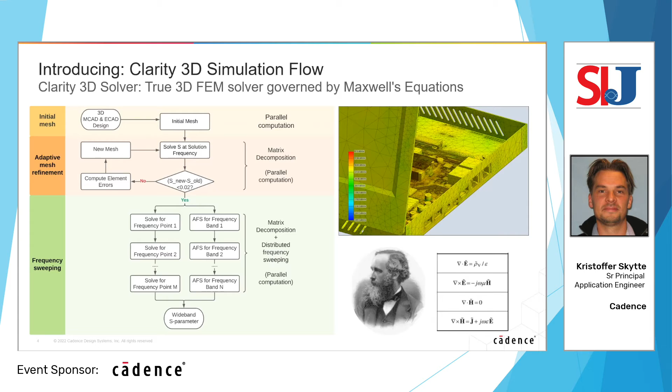So you might ask from Clarity, what is really new, what is being brought to the table here that's not existing in the market today? And that's shown in the next slide, which is we can separate this out into 4 groups, starting here on the upper left. One of the things particular to Clarity is that it integrates directly into the design environment.

So whether you're working within the Cadence design environment for IC, for package, for board, it's possible to launch Clarity directly, get results back that help you guide the design process. And you don't have to think about all the setup related aspects and the back annotation and so on. And this also actually applies across the microwave design environment from Microwave Office.

The other aspect, and this is actually one of the key enablers for allowing you to simulate bigger structures, is the massively parallelized matrix solver that we have added on top of Clarity. Essentially what it does is take the very big matrices that are typically built up by FEM solvers and distribute them across multiple machines through this parallelized matrix solver.

The nice thing about that is that with traditional FEM, you're limited to how much memory you can have on a single machine. That sets the limit for how big a project you can actually solve. With Clarity, because of this parallelized matrix solver, you're not confined to one machine. The entire matrix doesn't have to be within the memory of one machine. That means we break free from that limitation in other FEM solvers, which is that the matrix must be within the memory of a single machine.

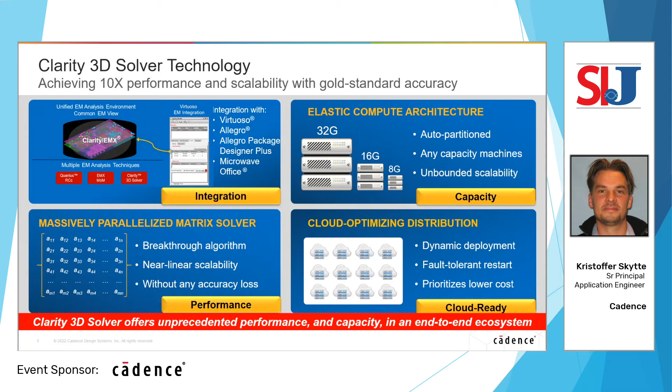So that was just a quick introduction of Clarity. Let's go in and look at the actual test case that we will be working on. This was already introduced in the beginning talk, but just reiterating in case you came in just for this presentation or later. What we have selected for benchmarking is the Wild River Technology CMP 50 platform, which is essentially a 50 gigahertz advanced channel modeling platform. The target application is to allow you to consistently get correlation between the EM solvers that you're using and measurements.

It combines 27 different structures based on primitives for calibration tasks, for VNA gating, time domain transforms. It has a number of very lossy structures. There's resonators, multi-impedance structures, via fields, and so on. The particular sample that we are looking at was assembled with 2.4 vertically launched female connectors, so that will take us up to 50 gigahertz in bandwidth.

Whenever you have such a correlation task, you want to correlate against measurements. There's a lot of things you need to consider to go to 50 gigahertz and beyond, and the prime points are listed in this slide. The first point is material identification. You really have to be sure you have the right properties for the dielectric values, the surface roughness, and of course also the stack-up dimensions, the height and the trace etching and so on.

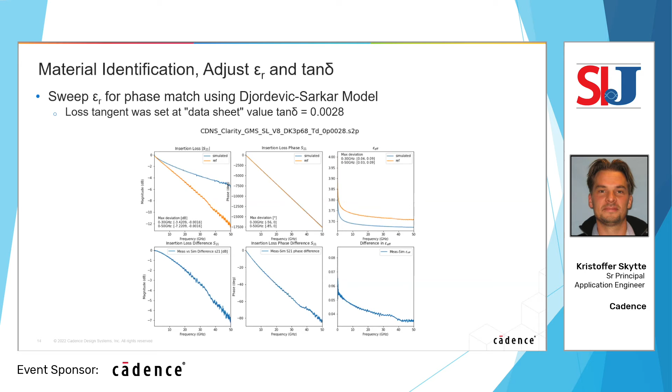But what is very evident is that we're not meeting the magnitude at the moment, and that's because the surface roughness plays a very important part, and that is what the next slides will talk about. What we're going to be using for this particular case is the Huray surface roughness model. This surface roughness model has two parameters to it. There's the surface ratio, and then there's the radius of the nodules that are being used for this model.

So when you look at the model, this is typically defining some stack of balls or nodules, spheres, and it has a certain number of layers. For the particular model that we're going to be using, commonly referred to as the Huray cannonball model, it has an array in the bottom of 3 by 3 balls with radius r. And then we stack a total of 3 layers. So we have a total of 14 balls in the stack.

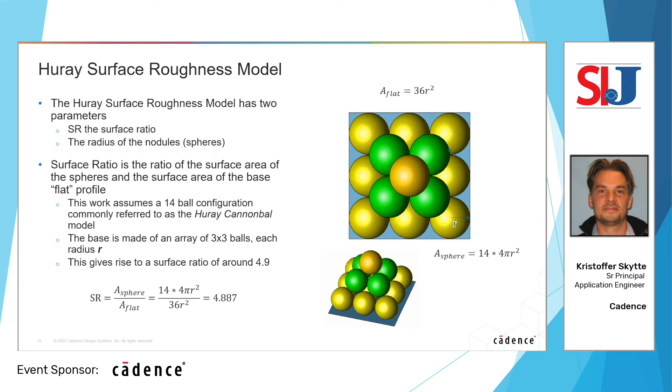And when you then calculate out the surface area that they cover versus the surface area of the spheres, we end up with a surface ratio of around 4.9. And that's what we'll be using. So we just have one value to sweep, which is the radius of the nodules. The radius of the nodules or spheres in the cannonball model here needs to get some data from, say, the data sheets. And typically in data sheets, you're going to find a couple of different values depending on the material you're looking at. There's either the 10-point mean, the average value, or the RMS surface roughness value.

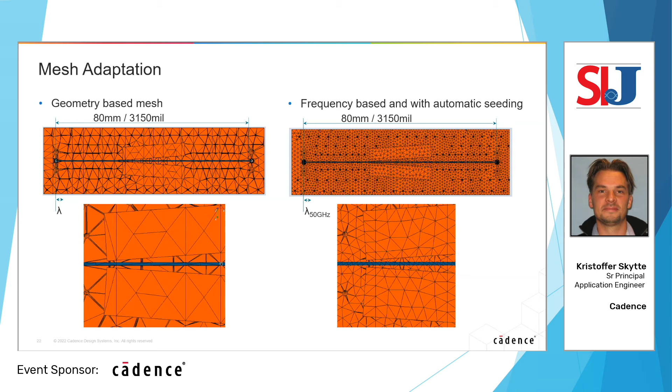So what Clarity will do is that it'll apply a frequency-based adaptation of the mesh, plus also automatic seeding around the transmission line segments. And so the result from that is you now get a lot finer initial mesh to start out with in the Clarity solution. And you can also see that now the mesh element size is more comparable to the wavelength here. And then it goes through a number of iterations until it meets your convergence criteria. And that's what's shown in the next slide here.

And then as we go further and further away, you would expect that the mesh becomes coarser and coarser because the main things that are happening are in that area plus along the trace. And that's indeed what we see in this case here.

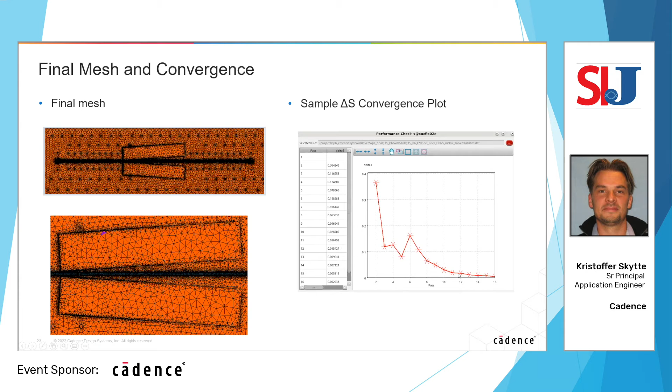So in this particular case, we actually used quite tight convergence criteria because we wanted to be sure we could do a good TDR as well. And that's another topic we'll come back to and talk about a bit. But generally, what you're expecting is a nice monotonic trend towards your convergence criteria, or good mesh adaptation.

But the primary change is actually going to be on the insertion loss magnitude as well as the return loss. So for this particular case, because there's a lot of stuff going on in the return loss, we're just plotting up to 20 gigahertz.

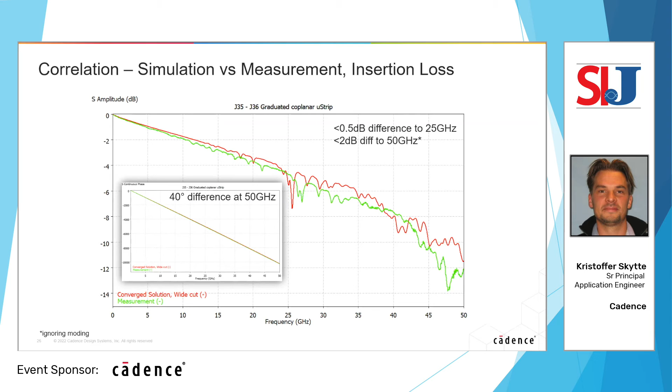The phase itself is within 40 degrees out of 11,000. So that's a tiny error. So overall, considering again that we didn't include the fill in the dielectric modeling, we consider this to be a really good correlation.

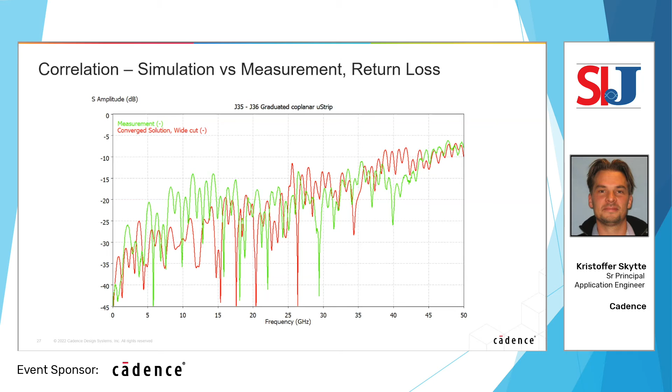Looking at the return loss, we see a similar picture from the point of view that the trends in the return loss are very close. It basically mimics the same behavior with a few exceptions here. The return loss is higher in the range from 5 to 15 gigahertz, and again, some differences around 40 gigahertz. And this is in fact related to the connector modeling and the exact transition region that we'll be looking at in the third part of this talk. Considering that most SI related specs have return loss requirements in the region of -10 to -15 dB, overall, this is considered to be very good agreement.

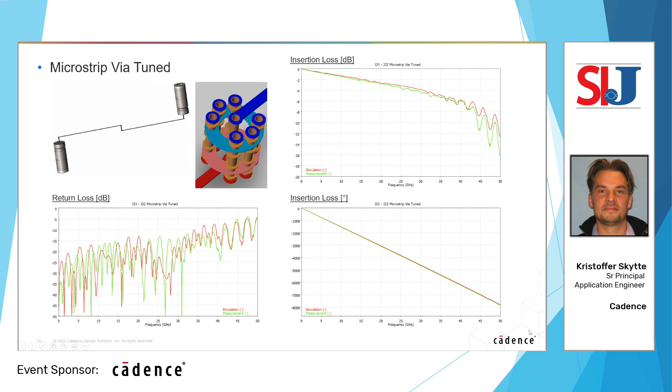Then looking at the return loss, the overall trends are in very good alignment. There is, again, a bit of gaps here, which is probably not going to matter for a lot of SI applications, but it's still interesting to know what's causing this. And again, we'll link that back to the discussions on connectors. And finally, looking at the insertion loss phase, that's also in very good agreement here.

Another interesting structure, staying with the microstrip. For those of you doing some of the more advanced DDR, in some cases you are forced to go with some tab routing. This is not exactly for tab routing applications, but it does help to show the kind of resolution you get with Clarity. So what you can see is we have the launch, going to the bottom side of the stackup, and we have a few very tiny tabs here. This is actually set up to resolve different TDR front ends.

What we're looking at here, though, is just the measurement to simulation correlation. And what you can see is that the overall response for insertion loss amplitude, for phase, as well as the return loss itself, is really in excellent agreement.

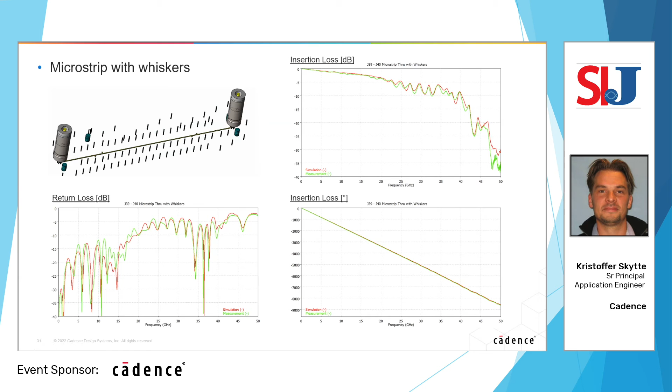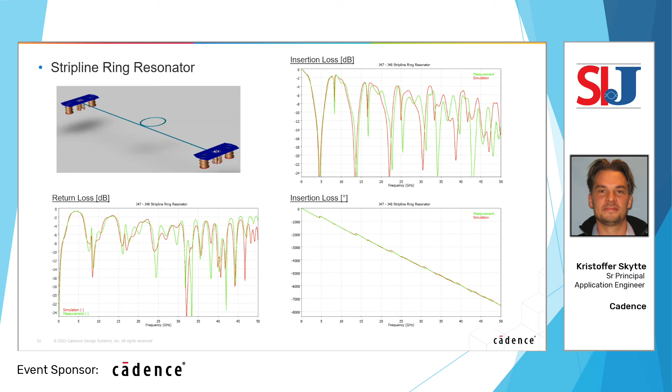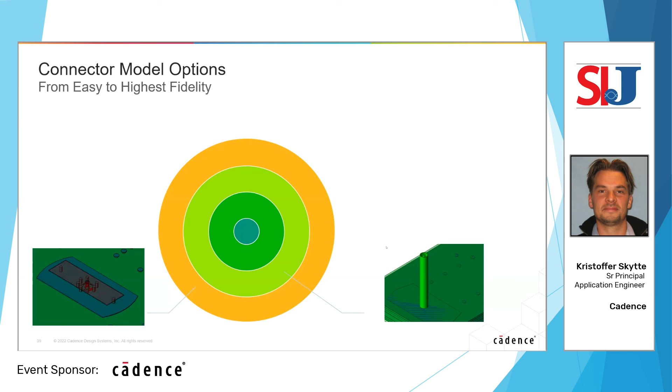The other option would be modeling the connector as the coaxial cable. Obviously, this will only work well for structures that look like, or try to look like, a coaxial cable. And it works really well for this particular case here. And then as we go into downloading data from the connector vendor, for instance, we could download our own model and then try to remove as many things that are not needed for the EM, such as threads and the screws and a number of other things.

Essentially for modeling, what you need is the transition region that's down here, as well as the reference plane. But even if you take a model like this, if you place a port at the center here where your measurement reference plane is, that will have some limitations. And again, we'll come back and talk a bit about that.

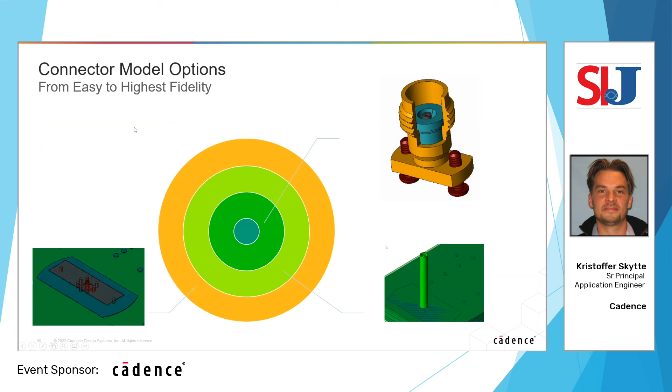And then the highest fidelity is going to be having a model that is as assembled. This is actually not for the connector used here, but this is where we have the actual part of the component that sits on the PCB. We have the male part that goes into that and are able to match up also with the coax cable, so we can put the port up here, but actually use the reference plane here where it would also be calibrated to in measurement, exactly where the connectors meet.

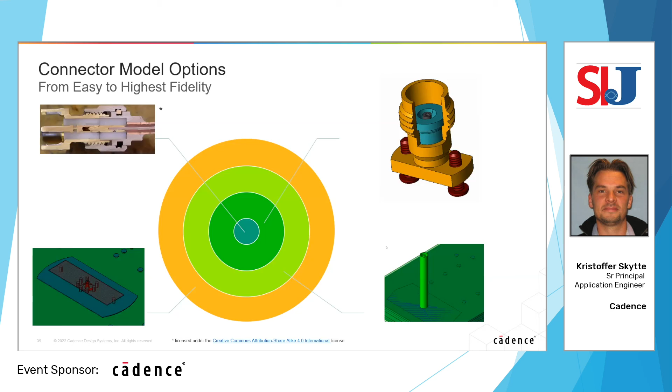But the interesting thing to note with this: even if it's matching the levels, there are some differences as to where we see the peaks in the return loss. And this is an important thing to understand, that if you see ripple differences like that, from a practical perspective, you probably don't care if you get this kind of good correlation. But if you want to know more about that, you would have to go in and look at the connectors and how the assumptions in the connector model actually play a role in the dips and peaks that you see in the connector response.

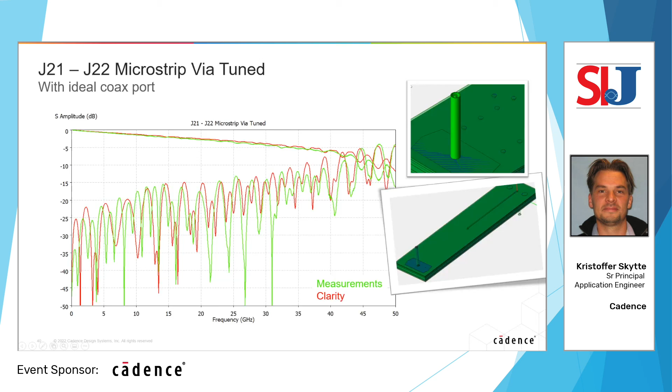But again, as shown on the previous slide, if you can get quite close on the return loss, you're probably going to be happy. But again, you want to understand where this may be coming from.

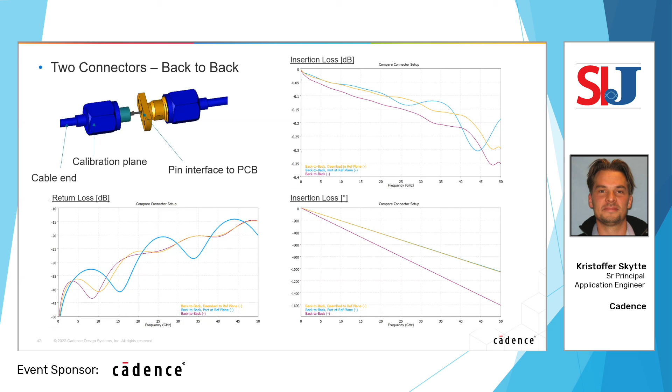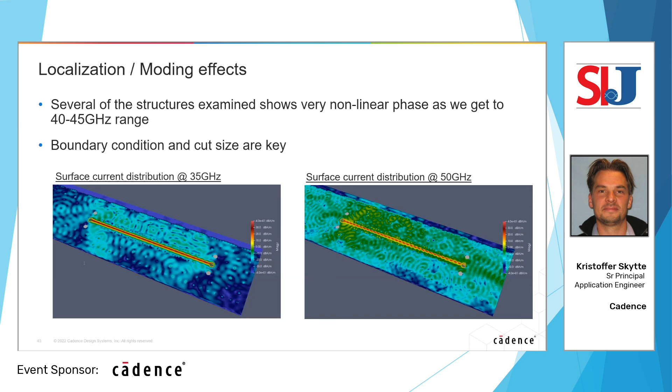And this becomes really important as you push into, say, 112G, and you want to look at channel isolation. You really need to consider the entire design in its full context, or many channels in their full context, not just focusing on a single channel. So boundary conditions and cut size are really key here.

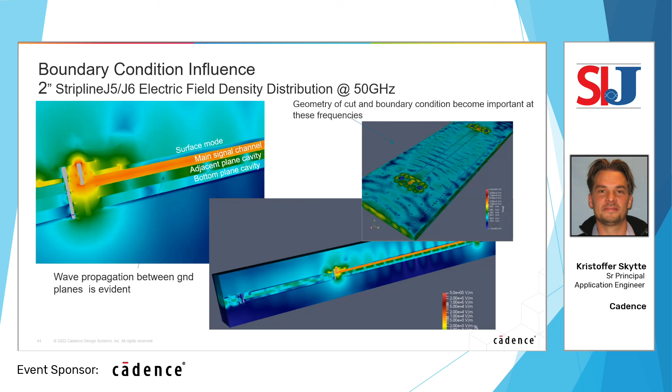So in summary, a robust procedure for material identification is a prerequisite for getting good measurement to simulation correspondence in the frequency ranges that we've been looking at. We've seen that the exact connector model geometry and boundary conditions are really important. And we've also seen that with a simple launch approximation, it's possible to get reasonable results for a coax type launch. It's expected that if you have a multi-way connector, that assumption is going to be less good.

Moding and backdrill stub tolerance can lead to significant insertion loss variation, in this particular case beyond 30 gigahertz. And overall, Clarity is both very accurate and has high capacity for solving challenging and large designs to 50 gigahertz and beyond. Again, when you compare against measurements, you really must take care that you understand the influence of the tolerances in the design, the connectors that you should be using, the boundaries, etc.